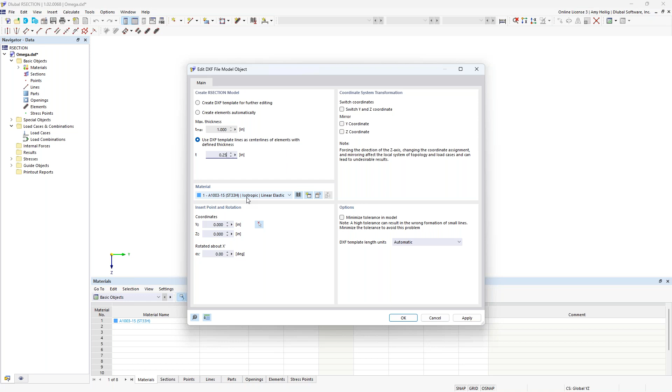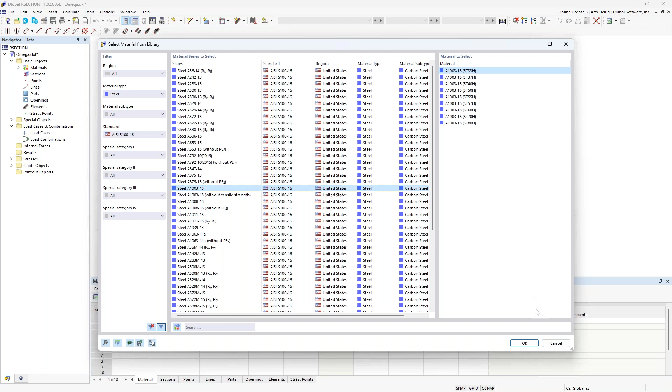We can visit our material library, and over on the left, we have the filters to utilize the steel dropdown and then the AISI S100. So here are all of the available materials for cold form steel. And notice that as we click through these different options, there are several subcategories as well. For this particular cross-section, we'll go ahead and utilize the A1003-15 and the subcategory here of ST33H. So that material will then be set within this dropdown, and we can go ahead and click OK.

So once the import is done, we actually see everything automatically generated for this custom cross-section. Now, I did want to point out that these are completely straight elements. We get a little bit better performance with the finite strip method with cold form steel sections when we just model directly these straight elements. It is possible to also model arcs at these corners where the elements join, but just know that the calculation time will be increased because of that. So ideally, it would be best to keep these as straight segments.

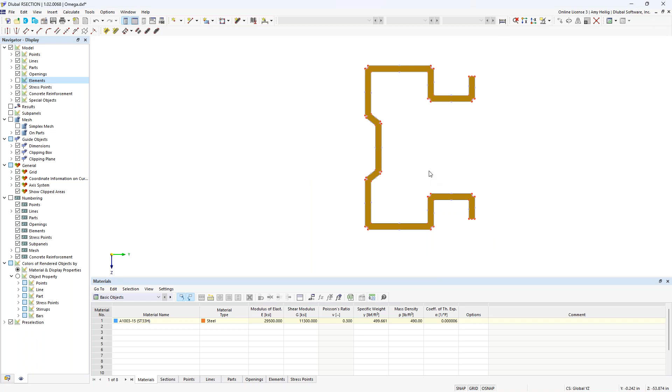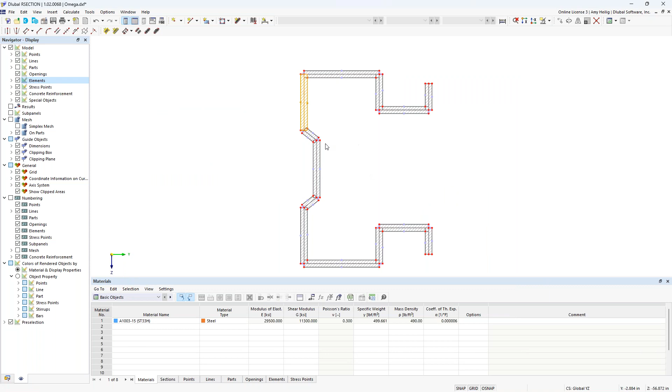Now, looking at the custom cross-section here, we have a couple of elements that, again, were automatically generated. We'll start off with what we call the part. And the part is automatically created between the exterior boundary lines here of the cross-section. Then on top of that, we have what we call the elements, and each one of these segments here is comprised of an element. We can right click to edit the element, and what you'll see here is that each of these has a particular thickness assigned to it as well as a length. And this information is important for the thin wall analysis and is required. So we would need both the parts and the elements.

So going back to the navigator here, I'm going to right click on the model name to access the base data. There are two analysis methods. The finite element analysis is set here by default, but this would be more so used for massive cross sections. Instead, we want to modify this to a thin-walled analysis.

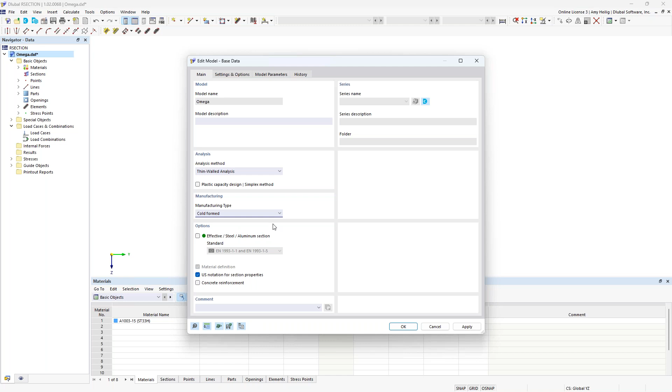Additionally, under the manufacturing type, we can set this to cold form. This will just be helpful once we bring this cross-section into RFEM that this data will already be set. When we click OK, we can simply go to calculate, calculate all, and immediately we'll see here that the cross-section properties are presented to us in table format.

So we have the area, for example, the moment of inertia, the section modulus, and this is the information that needs to be transferred to RFEM in order to understand the cross-section properties here of this section. Additionally, you'll notice the unit stresses are given here based on a 1 kip applied load, for example, for axial forces or maybe a bending moment. We can also view those stresses with the 1 kip per foot applied to this cross-section.

So once we have the cross-section properties, we do want to save this to our computer. In order to integrate in RFEM, we do have to have these saved cross-section properties from the calculation as well. And we will jump over to RFEM. So beginning our cold form steel structure today, when we create a new model, we would give it a model name. The type of model would be set to 3D.

And under this second tab, this is where we have our optional add-ons. So RFEM is the base program, and it's responsible for the modeling, the loading. We can integrate with BIM software, and it can run the full static analysis. So this means deformations, internal forces, support reactions. But if we want to take this a step further to actually carry out the design according to the AISI or the CSA S136, then we need to activate here the steel design add-on.

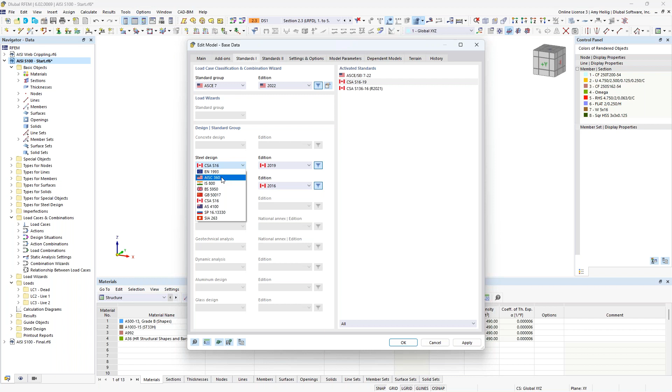So once this information is input, you can see here that for the sake of time, I have gone ahead and modeled our entire structure here. So this is some type of racking system maybe used for automatic storage and retrieval. Now we do have other webinars, tutorials that are dedicated to new users in the program where you can learn how to draw a beam, how to apply supports. So for the sake of time, again, we'll go ahead and just do a quick model review.

So over on the left in the navigator, we have here our various cross sections. So if I edit these cross sections so we can take a closer look, we'll see here the cold form steel sections applied to this particular model. So we have some channel sections, additional channel sections with stiffeners, and that custom cross section here was also brought in from RSECTION.

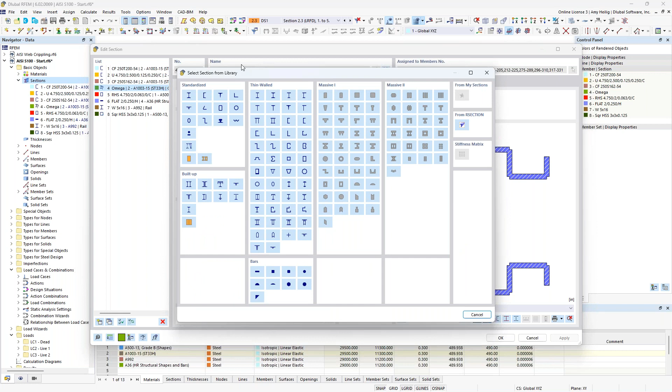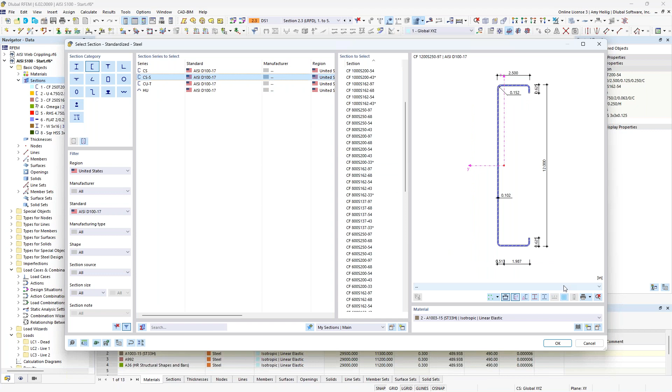When we look at our library database for our cross sections, if you want to choose a standardized section directly from the AISI, for example, if we take a look here at our channels, we'll utilize the filters once again on the left to filter to the United States, as well as the AISI D100-17, and we see the various channel cross sections, including hat cross sections, available to us here, again, directly from the AISI standard. Now, alternatively, if you have a parametric section that fits within the criteria listed here under thin-walled, you could simply input in the dimensions and the custom cross-section properties will be automatically calculated in RFEM directly.

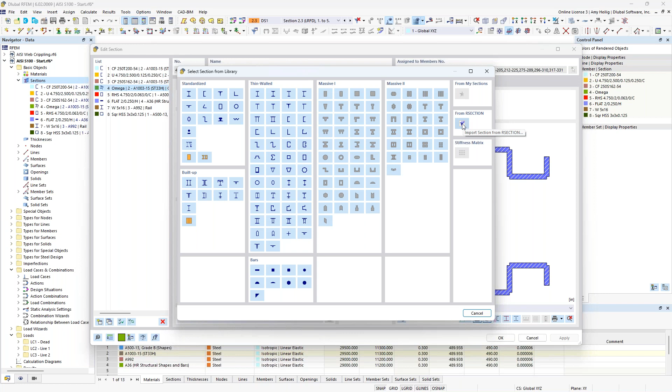And then alternatively, we have the import here from RSECTION, and that's what we utilized for the shape here in the background. I just navigated once I clicked this option to that saved file from RSECTION on my computer, and we can bring this in like we would any other member. So in addition to these cross sections, I have also assigned a material. So similar to our section, we can always visit the material database. Over on the left, we filter to steel, to the AISI, and once again, we have access to all of these various materials directly from the standard.

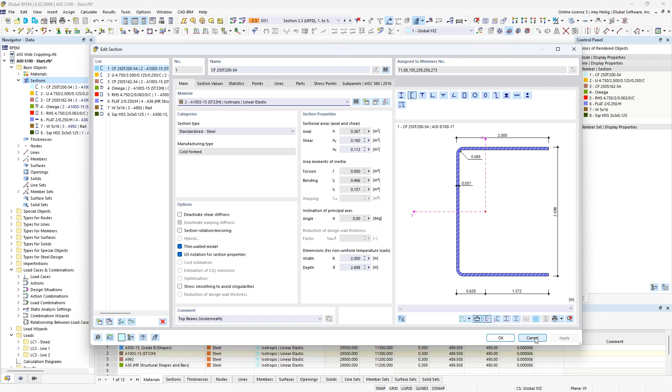So now that we have the cross sections and the materials covered here, we'll also see them within our navigator over on the left. When we take a look at that custom cross-section here for our column, and I'll zoom in, you'll notice that the program has actually rendered this true cross-section for me. And I'll go ahead and create a user-defined visibility here so we can see this in a bit more detail.

So you'll also notice that for these columns, utilizing the custom cross-section, they were actually modeled in segments here. So each one of these is a separate segment. Now, there is possibility in the program to model this as one continuous column and just to keep this as one member and applying intermediate nodes along the length. But alternatively, if we do model this in separate segments, it's entirely possible to create what we call a member set. So we do this by selecting multiple segments.

We can right click, and under the members option, we have here what's called create member set. So that's what you'll notice here over in my navigator, that the program has grouped together these columns. And this will come into play a little bit later on with topics like notional loads, but also the design. Again, wanting to design this as one continuous member rather than those multiple segments.

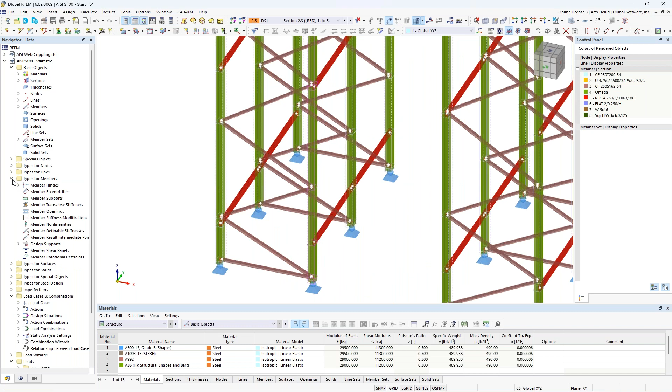You'll also see graphically the member hinges applied with the symbols shown at the member ends. So if we take a look at the types for members, we see here our various member hinges, and the member fixity all depends on how these cross sections or these members are connected to one another. So with cold form steel, it's quite typical to connect them with screws. And I have several different definitions here, just depending on what that connection is. So we have our 6 degrees of freedom. These are all based on the local axes of the member itself.

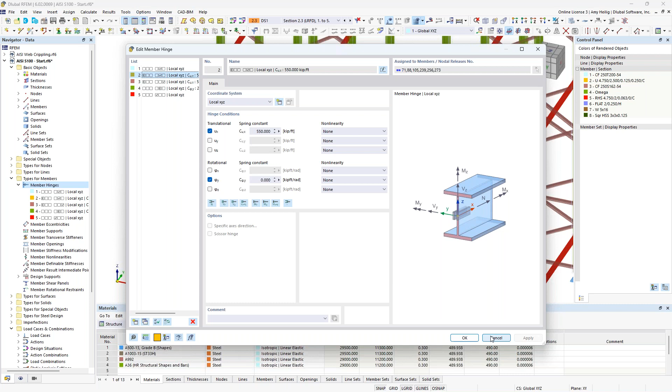You'll notice that for some of these, I've applied a spring constant. So something that's not fully fixed, not fully released, but somewhere in between. So within this model, we can take a look at the different hinges applied. They're probably a little difficult for you guys to see, but as I click through these, they are highlighted in the model depending on which member they are applied to.

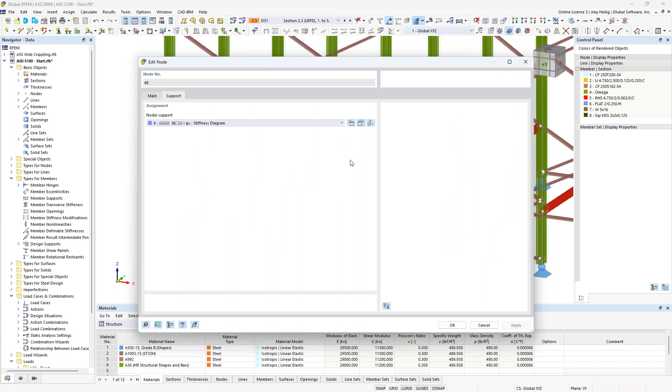And finally, we have our nodal supports down here at the bottom, which were applied just utilizing the tool up here in our toolbar. And these are also a bit special in the sense that initially they just look like standard pin connections, which you'll see under this definition type that we again have 6 degrees of freedom, but these are based on the global axes here, shown here in the background.

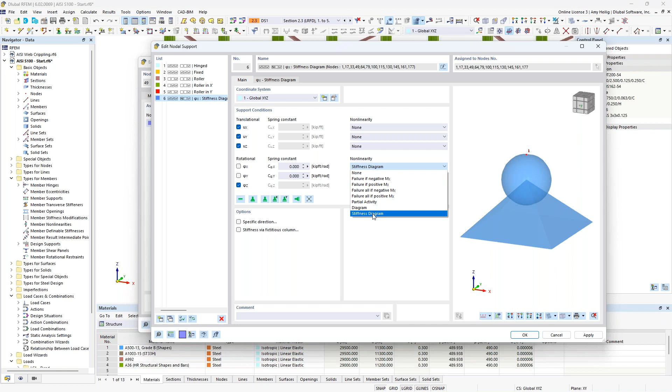So I've restrained the translation for this pin support, including the rotation about the global z-axis, but I've also applied a rotational nonlinearity. So this is within the rotation about the global x-axis, and under the nonlinearity options, I've applied a stiffness diagram. And we now get a new tab here where we can define this information. So you'll notice that I've set this so that the rotational stiffness is dependent on the contact pressure or the downward force for these nodal supports.

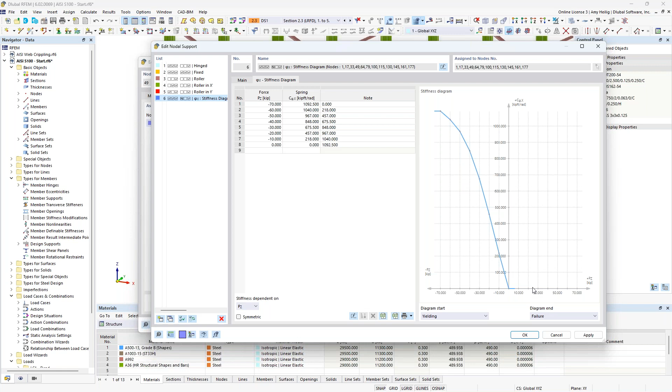So as the contact force increases here, we'll see a greater spring constant, and then in uplift, we'll see that support fully fail for rotation about the global x-axis. So entirely possible here to consider more complex scenarios for our nodal supports as well. So now that we have a basic understanding of the various members within the model as well as our supports, let us move on to loading.

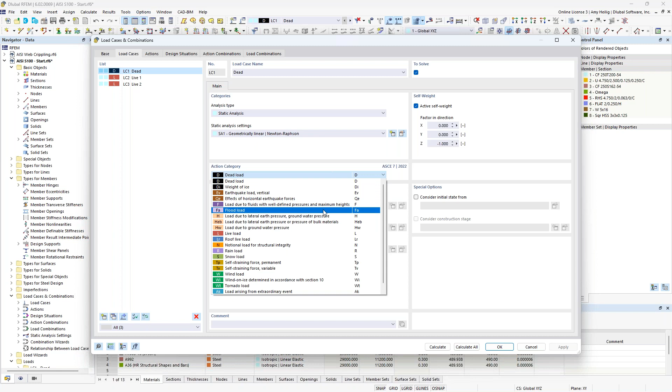So I have here 3 simple load cases that we can access in our load cases and combinations dialog box. So we have the first load case, which is dead load, and you'll notice that self-weight is active here, and the action category is also set, which is just dependent on the AISI S100, because remember back in the base data, this is the standard we're using to generate our load combinations. We can revisit that information here under our base tab, where we'll see the availability to change that standard if we'd like.

The second load case is a live load. So action category set to live, self-weight is turned off here. And finally, another simple load case, live load 2 with the action category set to live. So once these load cases are set up, we would need to actually apply the loads to the structure. So we'll begin here with the display of our dead load. So you'll see that I actually didn't apply any additional loads to this load case. We're only accounting for self-weight automatically under the hood for that particular load case.

Now looking at our live load 1, we see here, and I'll turn this into wireframe view, that we have the member load applied here at our beams, which are spanning between the columns. And a member load can be applied up here in the toolbar. But there is something a bit special about this particular member load. If I double click on it here, we'll see that it's just a standard downward uniform load of -0.5 kips per foot, but we have the ability to consider an eccentricity on the loading.

So when I turn this checkbox on, I get the additional tab up here at the top. Now the default behavior for a load is typically applied at the center of gravity or possibly the shear center. But alternatively, we can move that load application up here to the top center point so that perhaps we want to account for some additional torsion within the member for the design, or we can do so directly within the force eccentricity.

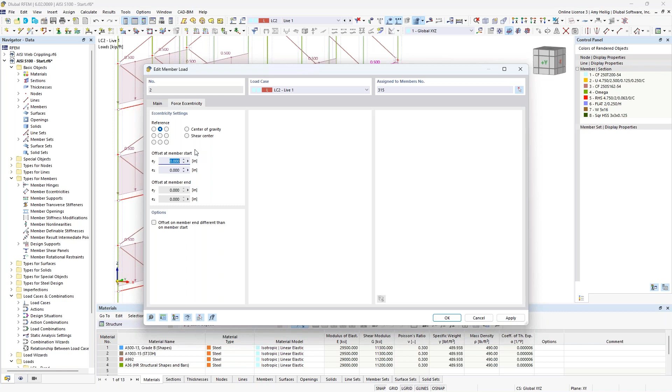So in addition to this first live load, we also have this second live load, and this is also a very simple application with a single nodal load applied up here to our center beam. So this load is just essentially introducing those horizontal forces to the entire racking structure. That nodal load can also be applied up here in our toolbar.

So going back to our load cases and combinations, now that we've generated those load cases, let's take a look at the design situations. So the program has automatically created 2 design situations for us, our LRFD design situation and ASD design situation. Again, these come directly from the AISI S100, and it's nothing more than just grouping together our factored load combinations for the first design situation and our unfactored load combinations for the second design situation.

We can always click on this little info button here, which will pull that information directly from the standard of what we're referencing. Design situations are absolutely needed when it comes to carrying out the design within the steel design add-on that we activated. So that's why you'll notice that these are by default checked on here for that particular add-on.

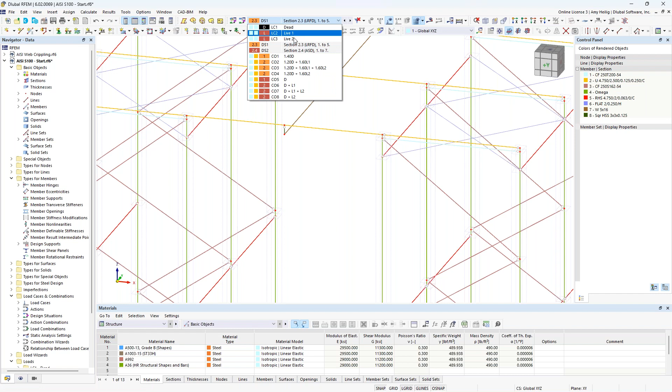So if we look back here at our model and keep in mind under this second live load, particular load case here, we have this horizontal load. So therefore the notional load to create the greatest destabilizing effect should likely be in this same direction. So those notional loads all just depend on the load magnitude and direction here for our load cases to consider that destabilizing consideration. So we want to begin by creating these notional loads with what we call imperfections.

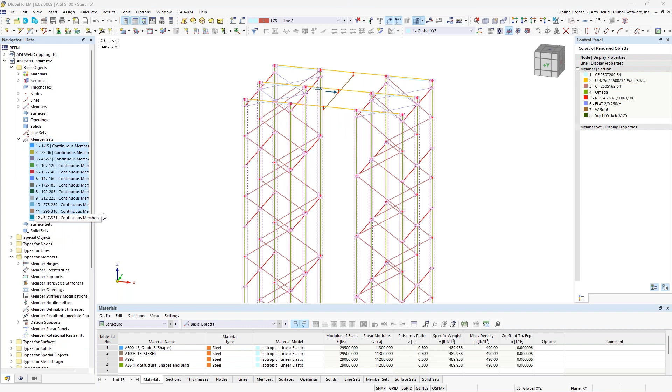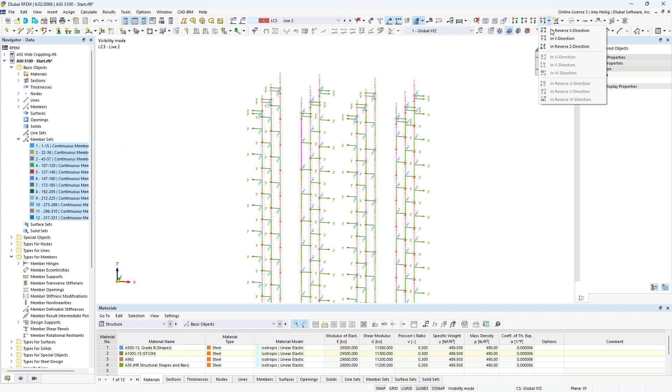So I'll begin by creating a user-defined view here for only my member sets. So we'll go up here to our toolbar and create that user-defined view. I'll go ahead and turn off the hidden objects in the background. Now, additionally, when we create our imperfections or our notional loads, these do depend on the local axis system. So if I right click, I can turn on the local axis system of all of these columns. So we'll take a look at the elevation view here.

Now, the imperfections are going to be available under our navigator here under the imperfections table. So we right click to create a new imperfection case. Now, again, the imperfection directions or the case all depends on which direction you want to apply them in your model.

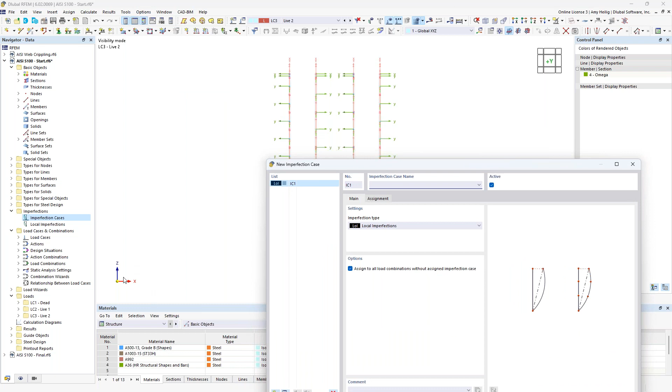For our case today, I'm going to create two simple imperfection cases, one in the global positive X direction and one in the global positive Y direction, or into the page here. Therefore, I need two imperfection cases. So we'll begin with imperfection in the X, and then I simply make a copy of this and I'll create my second case, imperfection in the Y.

Now, the imperfection type within this dropdown will be set to local imperfection. And under the assignment tab, there is the ability to assign specific imperfections or notional loads to specific load cases. Alternatively, though, we can just apply it to all of our load combinations, which is what we'll be doing today. So now that these imperfection cases are generated, we need to actually apply the notional loads to the structure. So now you'll see here under our imperfections folder these two imperfection cases.

Now we can apply according to each individual member, or we have the ability to apply to a member set. And because these columns are individual segments and I created member sets to group them together as one continuous member, then we will want to right click here to create a new member set imperfection. So within this dialog box, we use our drop down to directly select the AISI S100. And this is going to reference equation C1.112-1 directly from the code. So this should look familiar if we look that up within the code.

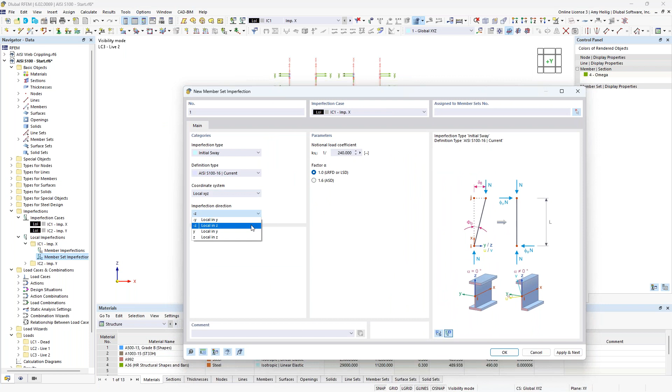So for our case today, this first imperfection in the X direction, we want to apply this based on the negative Z axis. And I'm going to select here my member sets in the first row and the third row. And we might be wondering, why are the local axes different here for the different member sets? And that's because in rows 1 and 3, I have the members rotated at 90 degrees. And then at rows 2 and 4, they're rotated at negative 90 degrees. So inevitably, this affects our local axes orientation, which is why we need to take a two-step approach here for the imperfection direction.

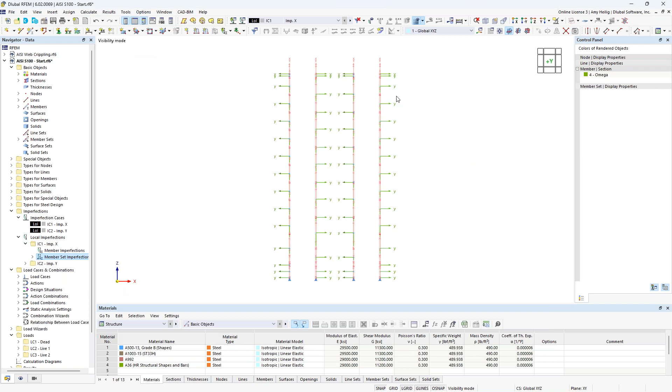So now that I've applied it to those particular member sets, I can click Apply and Next to remain within this dialog box and to simply modify my imperfection direction to the positive Y local axis. I'll go ahead and select these graphically as rows 2 and 4. I click OK, and I click OK once again. Now, if we display our notional loads here, or imperfections, we see that column out of plumbness applied, again, referencing the AISI, to our member sets or our columns directly.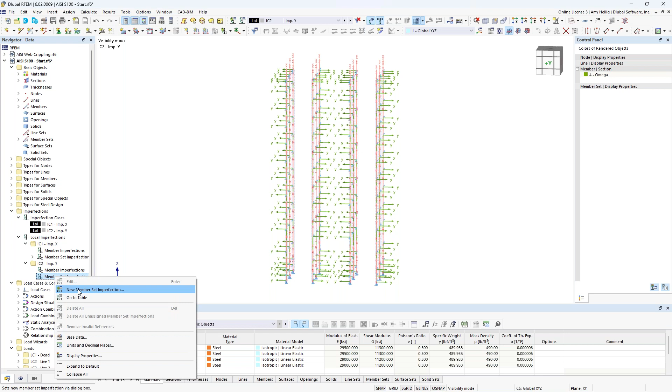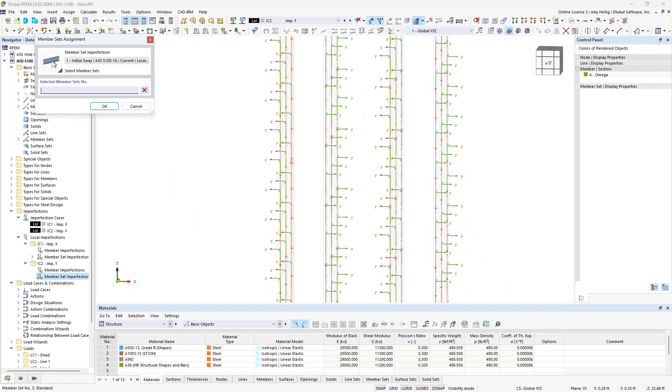We're going to do the exact same approach here for our members for imperfections in the Y direction. So we go back to our navigator to right click to create a new member set imperfection, this time under the imperfection Y case. We'll select the definition type directly as the AISI S100 once again. The imperfection direction this time is going to be in the negative Z axis, and I will go ahead and zoom in here to select the member sets in the first row and the third row. I click OK, apply and next, and then we just simply modify this to the positive local Z axis to select our member sets in rows 2 and 4.

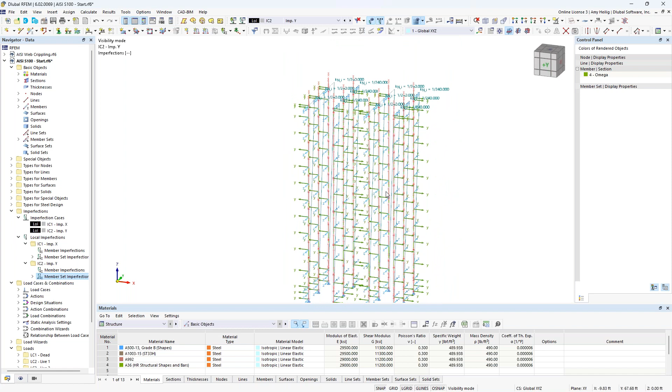I click OK through these dialog boxes, and now we should see this column out of plumbness, and I'll go ahead and right click here to turn off the local axis system, applied in the global Y direction. So this is how we can directly account for those imperfections based on the code requirements.

Now that we have applied the imperfections in these various cases, we need to combine them into the actual load combinations. So I'll drop down here to my dead load, and this will allow me to access the load cases and combinations dialog box. And under the design situation where we had previously set the second order analysis, we'll go back into this dialog box, and you'll notice here that we have a checkbox to consider the imperfection cases that is automatically turned on by default.

So therefore, for my factored load combinations, those imperfections will automatically be added in to the existing load cases as well. Now, the problem is that I want to carry out LRFD design today for my cold-formed steel structure, but I'm using my ASD design situation for maybe my serviceability or deflection checks.

Therefore, I don't want to consider my imperfections for this second design situation. Well, it's easy enough to create a copy of this existing definition type, and within this copy, I just simply turn off the imperfection cases.

So now going back into my main dialog box for my factored load combinations, we'll keep this as definition number 1. But for my unfactored load combinations, we're going to drop down and select the third option here where we turned off the imperfections.

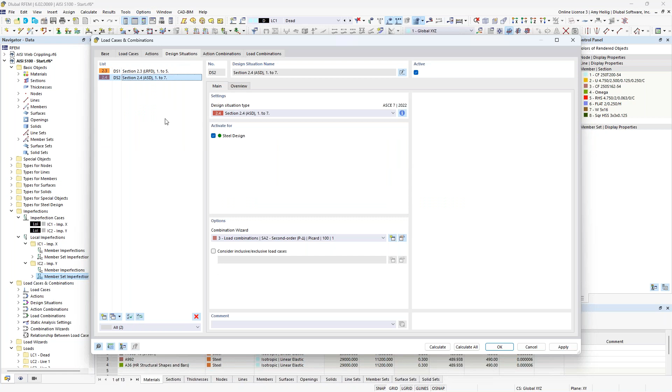The final topic, according to the direct analysis method, is stiffness reduction, and this is given in section C1.1.3. We reduce this stiffness to account for inelasticity effects as well as cross-section deformations. So in order to take into consideration the stiffness reduction, we are once again going to go in here to our combination wizard settings. And this option is actually controlled directly here with a new structure modification.

So we create a new definition type, and we're going to be applying this to our members. When we turn this on, we get an additional tab here, where under the member modification, we can use our dropdown to create a new member stiffness modification.

Now, very similar to what we saw with our imperfections or our notional loads, we also have the AISI S100 available in this dropdown. So this will reference the code directly and the particular equations given here to iteratively calculate this tau sub B factor that will be applied to the flexural stiffness for each member. And again, this is very similar to what we see within the AISC.

Now we also have an additional factor here of 0.9 that's applied to both the flexural and the axial stiffness. Now a difference here from the AISC is that within the AISI, this is 0.9, but within the hot rolled steel standard, this is 0.8. So that is one difference that you'll see here.

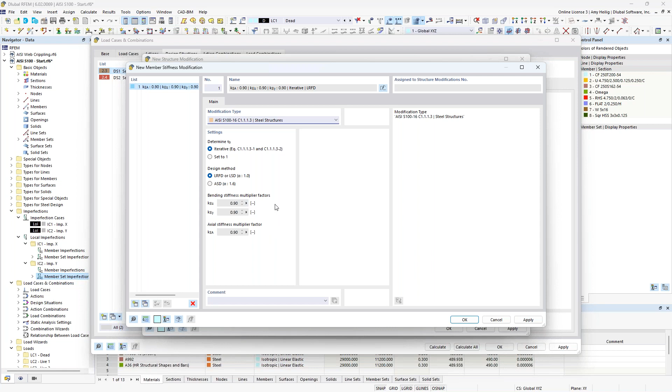Now, the code says to apply this stiffness reduction, once we have defined this, to all members that contribute to the lateral stability. So we certainly could use this option here to graphically select those members, or we could input the member numbers. Now, alternatively, we can just apply the stiffness reduction to all members. The code goes on to tell us that this is also possible.

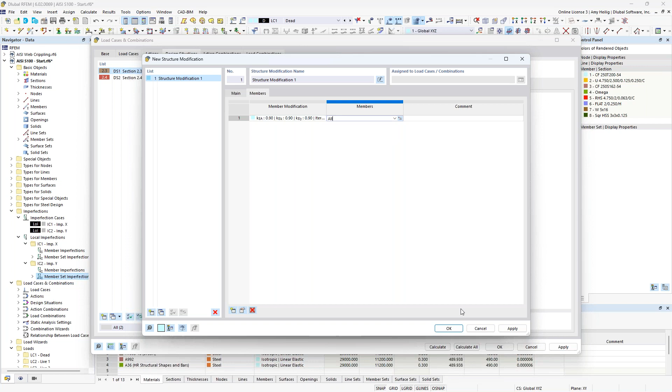So if we use our drop-down box for all, we'll now apply those stiffness reductions to all cold formed steel members within this model. But yet again, I only want to consider this for my strength design, which will be carried out with this LRFD design situation. For my unfactored load combinations, I do not want to reduce the stiffness, so I simply leave this unchecked here.

So once again, we'll go back to the load combinations to check this out in more detail. And sure enough, for each factored load combination, we see the additional setting here to reduce the stiffness. But if we jump down to our unfactored load combinations, this option is turned off.

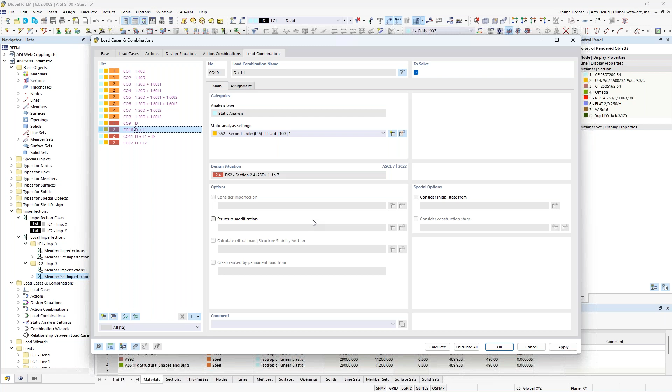Okay, so now that we have fulfilled the direct analysis method requirements, we're technically ready to run the full analysis. But the huge benefit of RFEM 6 is this better integration of these add-ons for the design within the main program. So we'll go ahead and continue on with some of the design input information specific to the AISI to carry out that workflow.

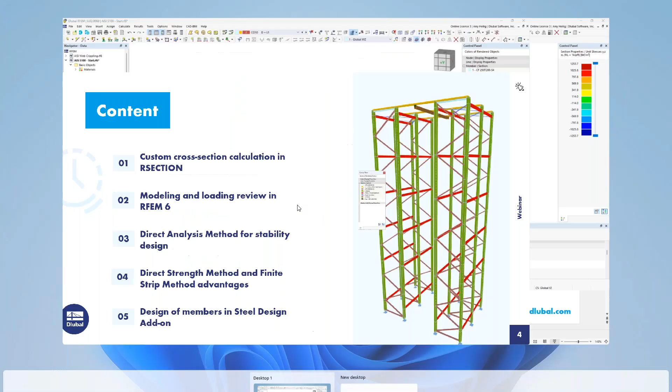For this, I'm going to go back to the PowerPoint here because I do want to talk in a bit more detail about the member buckling behavior. Very important topic when we're talking about these very thin-walled cross sections. So we know that there are failure buckling modes that are typically caused by compressive stresses on our members. And this is usually seen when we have a bending moment or an axial force.

Well, when we're talking about cold formed steel, there are 3 buckling modes that we typically consider. The first is going to be local buckling. So this is essentially where the elements bend with no translation at fold lines. And what I mean by elements, if you remember back to our custom cross section here, each one of these segments is a particular element.

Well, what we see also with this failure mode is that we have a short half wavelength. And what I mean by wavelength is this is the length at which the buckling shape repeats along the full member length.

Now, additionally, we also have global buckling to consider, and this is lateral bending of the entire member, and we typically think of this with flexural torsional, or lateral torsional buckling. Now for this, we'll see one long half wavelength, which is always dependent on the unbraced lengths for these particular buckling modes.

And finally, a bit more unique to cold-formed steel is distortional buckling. So this is more or less a combination of local and global failures, where we have some translation at the fold lines, but also the half wavelength is somewhere between what we see for local versus global. Now, there are 2 methods throughout the AISI to address buckling. The first is the effective width method, and the second is the direct strength method.

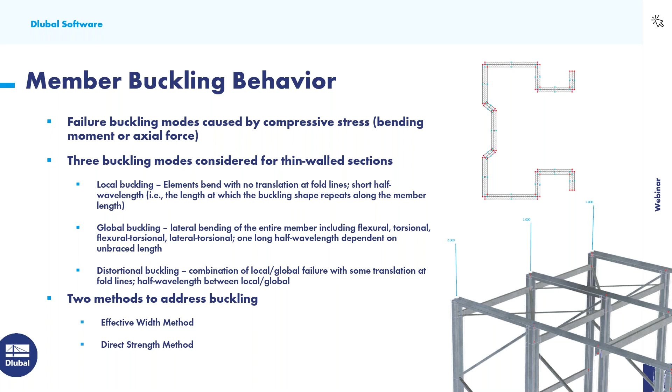So going to our next slide here, let us talk a little bit more about the effective width method versus the direct strength method, and maybe some advantages here that we have. So the effective width method essentially will consider each individual element here. So again, these elements are what comprises up our cross section. And an effective section calculation is required for each one of these elements. And we really don't have any interaction between these elements for the overall member or section behavior.

Now, alternatively, when we turn to the direct strength method, and this is going to be the method that RFEM is going to utilize, this has definitely some advantages in the fact that no effective width calculation is required for each one of these individual elements. There's no iterations required, but rather the gross cross-sectional properties are used for the entire section. We also have the interaction of all elements for all stability limit states because we're not considering, again, these individual elements, but rather the full cross-section itself.

We also have compatibility and equilibrium maintained at the element junctures. So where these elements connect is specific to the direct strength method, which, alternatively, in the effective width method, are more or less not accounted for. Direct strength method is also applicable to a broad range of sections. We might see more limitations when we talk about the effective width method and which cross sections it can be applied to. With the direct strength method, we really do have a lot more freedom here to apply this to pretty much any custom cross section as well.

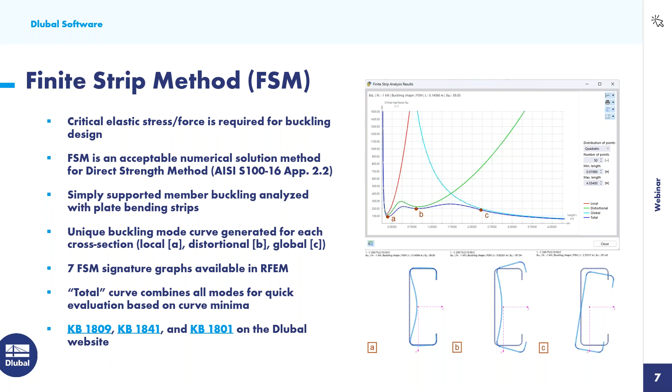Now, this is certainly a very interesting and complex topic, so I would refer you here to some knowledge-based articles that we have directly on our website that explain the finite strip method in more detail. It directly references the AISI. Those hyperlinks are included in the PowerPoint handout that you can access within the GoToWebinar to see those on our website in more detail.

Okay, so what we will do now is to go back to the RFEM model, and I'm going to revisit the cross sections here. So looking at the various cross sections, we'll immediately jump down to that custom cross section from RSECTION in particular. If we use our drop down over on the right, here are those 7 unique graphs that I just mentioned for the finite strip method. And these are all based on the applied unit load.

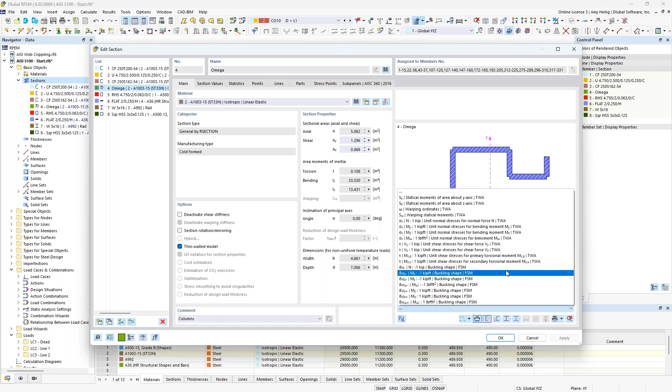So if we take a look at 1 kip axial force, what we will see is that finite strip method plot, again, referencing that PowerPoint. And this currently is showing the total curve. But additionally, what we can do here is to plot the local curve by selecting it within this dropdown. And we see that appear over here on the left-hand side with the red curve.

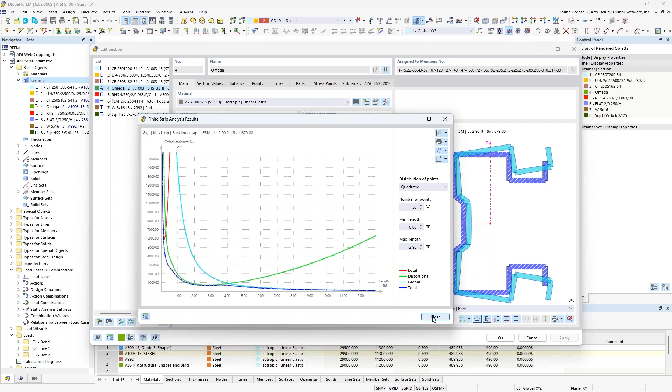We can also display the distortional curve. And finally, we can display the global curve. And ultimately, that total curve is going to consider all 3 of these, again, for just a quick evaluation here based on the curve minima along the length. So this is what's happening underneath the hood for every single cross section, again, even if it's a custom cross section.

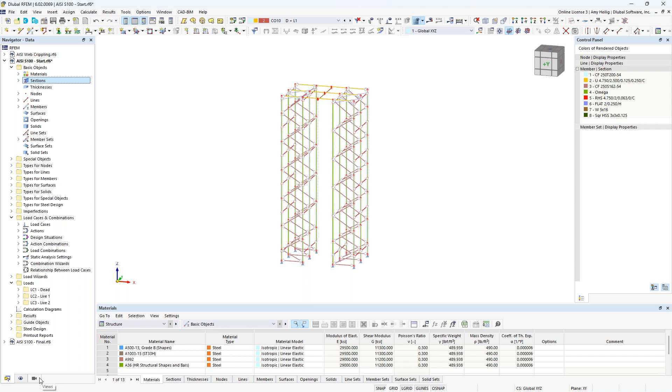So now that we have a better understanding of the direct strength method, finite strip method, we'll go ahead and take a look at global buckling now in a bit more detail with effective length definition. So when we design our members, we need to input information such as unbraced lengths. We'll begin here with activating only my rectangular HSS section. So let me go ahead and show the rendered view of this so you can understand exactly where these cross sections are. So these rectangular sections are spanning in between my columns. And we'll begin with the effective length definition for these particular members.

So we highlight them all, we double click, and what you'll notice is that the design properties here is turned off. This is telling the program that I'm not interested in carrying out the actual design according to AISI. Rather, I only want to carry out the analysis. When we turn on the design properties, this is going to reference the Steel Design add-on, and we get additional tabs here up at the top. So this is all information that is specific only for the design.

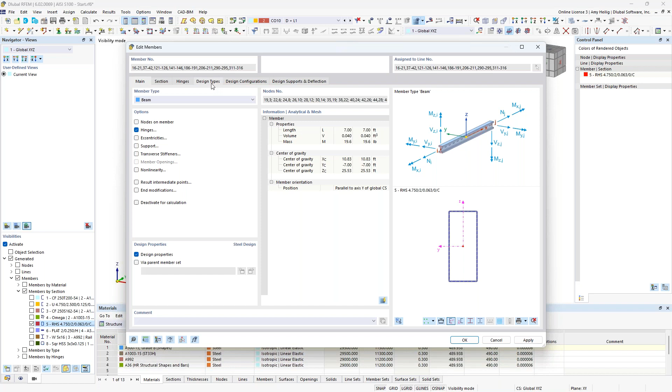Under the design types, we have here the effective length definition. So let us go ahead and access a new effective length definition. And you'll see here I can modify my view within this dialog box so we can see those HSS members spanning between the columns. We immediately want to change this to the effective length definition according to AISI S100 for these rectangular hollow sections.

Then you'll notice that for global buckling, we have here 4 considerations: flexural buckling, strong and weak axis, torsional buckling, lateral torsional buckling. We also have the ability here to determine the elastic critical stress according to the finite strip method or according to chapter E2 F2.1. So this is a really important topic. So I'm going to jump back again to the PowerPoint here to explain in a little bit more detail.

So you'll notice within this dialog box, as I just showed you, that we have 2 options here to determine the elastic critical stress. And the first option being the finite strip method or the numerical method. And this is going to be applied then for local, distortional, and global elastic buckling failures. But it should be known that if we do choose the finite strip method, that flexural and torsional stability failure modes are always grouped together for the global buckling. And this is regardless if we uncheck one of these options.

So if I am thinking, okay, my member is fully restrained against torsional buckling, but I'm still concerned with flexural buckling, so I fully uncheck this option, the program doesn't care. It still sees these grouped together because we're referencing the finite strip method graph. So this is purely a limitation of how these graphs are created, that flexural and torsional buckling are always grouped together.

Now, alternatively, if we leave these checked, but we have varying effective lengths or unbraced lengths for flexural versus torsional, again, because these are grouped together, we are always going to take the longest effective length. So if we would like to set a smaller length for torsional buckling versus flexural, again, the program just groups them together for those particular global stability checks and will reference the longest effective length. So just keep that in mind with the finite strip method, again, with the global buckling.

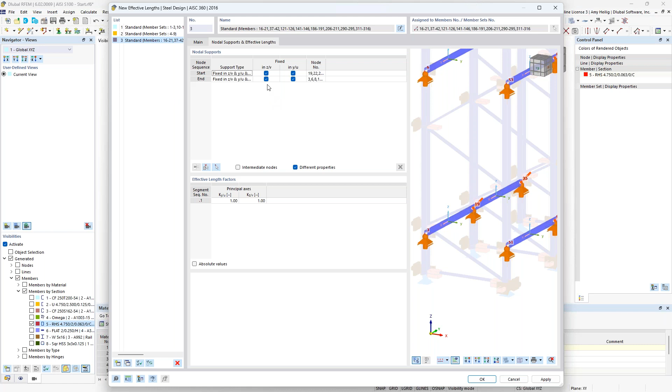Under this second tab, this is where we apply our intermediate supports, and you can see the program automatically will apply these at the member ends, and we will be fixed for flexural buckling in the strong axis as well as the weak axis. So that effective length, KL, will automatically be calculated for all of these members shown here.

So once we are done with the effective length input, we also have the ability to apply a local section reduction. Just keep this in mind that this is only for the tension design according to the AISI. We do not carry out any equations at this point in time for cold-formed steel considering holes. So everything is considered without holes.

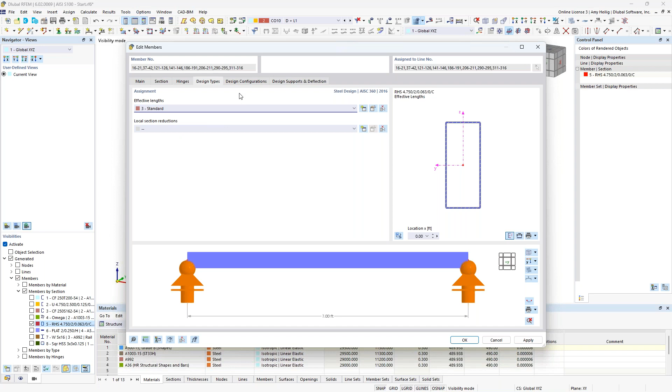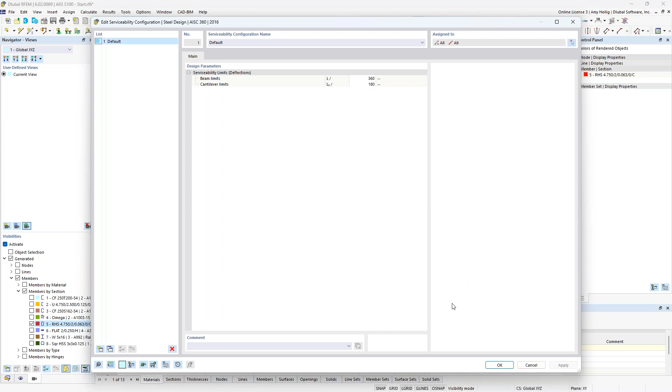Under the design configuration, we have here our strength configuration. So we take a look at the default settings here, just some various settings that we have put in the code references directly for alternative equations. So you could certainly take a look at here and make those modifications if you'd like. Under serviceability, this is just simply where we set our limiting deflection ratio for our deflection checks. So for simply supported members, we will reference this L/360, and for cantilevers, we'll reference L/180, but of course you can make modifications to this design ratio here.

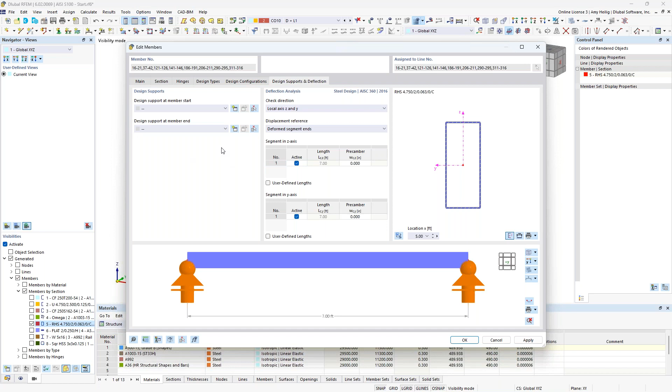And finally, we have the design supports and deflection. If I do absolutely nothing within this dialog box, the program automatically assumes that it's supported at either end. Therefore, we're going to reference the L/360 limiting deflection ratio. For our case today, we'll go ahead and leave this as default and not make any further modifications here. So now that this information is complete for these rectangular sections, I'll go ahead and cancel out my visibility here.

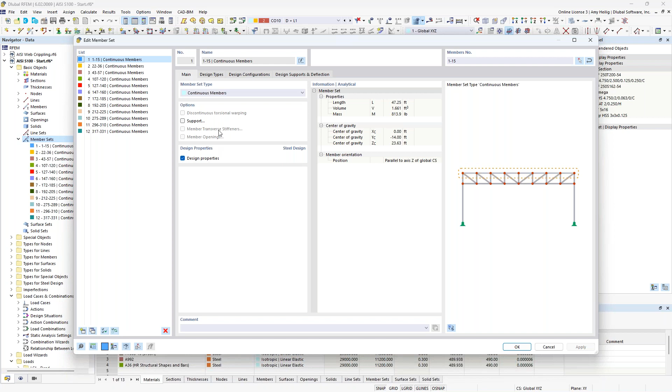I also have carried out the same workflow for my member sets. So remember, I want to design these columns as one continuous member. So rather than going into the individual member settings, we can come in here to our member sets. And what you'll notice within this dialog box is that this also has a design properties checkbox. So when this is turned on, we have some additional settings up here at the top within these tabs that look identical to what we just covered.

Now, because this column is certainly much more complex, I went ahead and defined the effective length already here. So you can see that I have flexural, torsional, lateral torsional buckling all considered. I'll go ahead and change around my view here so we can see exactly which members we are looking at. I am referencing the analytical method here because I have some different unbraced lengths for torsional buckling versus flexural buckling.

Now we have the ability to detect these intermediate nodes along the entire length, and notice that there are 4 degrees of freedom. This just all affects the effective length definition here for flexural buckling in the strong axis, flexural buckling in the weak axis, torsional buckling, and lateral torsional buckling. So depending on our particular connection and what members are framing in here, we can set these accordingly.

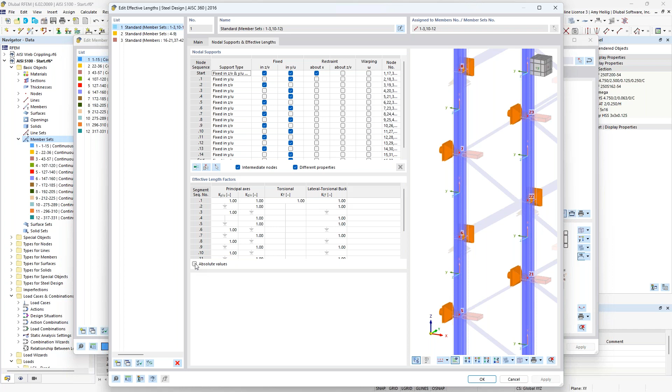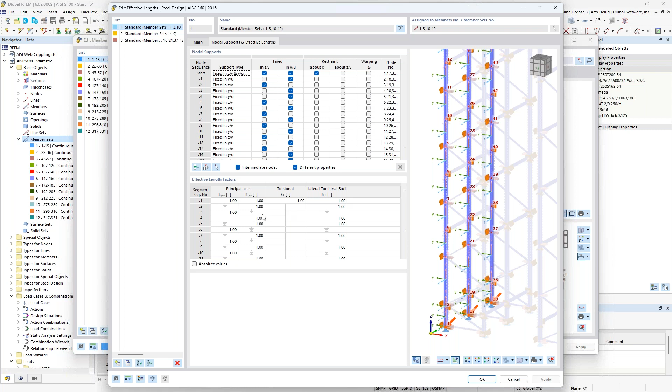And alternatively, if you have absolutely no interest in inserting in all of these intermediate supports, you can check on the absolute values here and directly input KL for each of these failure modes. And the downside to this is that if the model has any changes, maybe nodal location, we modify these slightly. If we use these options up at the top, everything will be automatically updated for our unbraced lengths. Alternatively, if we override these, we would need to come in and manually modify them, but that's certainly an option that you can take advantage of.

Also, under the design supports and deflection, you can see here that I have assigned specific design supports depending if the member is supported in the strong or weak axis direction. And these are applied all along the member length because I really don't want to reference the full column height for my limiting deflection ratio, but rather I want to reference the L, or the length, in between these intermediate supports. And we do so with the design supports. And notice that all of these intermediate nodes were directly detected within the program.

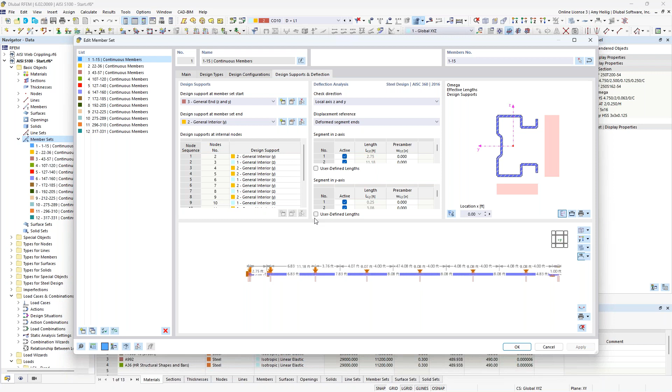Okay, so now that we have this information defined, such as unbraced lengths, we'll go ahead and exit out back to the program. And we want to jump down here to the steel design add-on. And you'll notice under this first tab, we have our design situation. So I had mentioned that if we carry out the design, we have to use these design situations. And the reason why is we see our first LRFD design situation that we are going to relate in the second drop down here to the strength limit state according to LRFD design. I'm using my second design situation, ASD, and I'm relating this to serviceability.

Now, alternatively, if we were carrying out ASD design, then maybe we would turn off altogether LRFD. We would set our strength limit state according to ASD for our ASD design situation. We can make an additional copy of this design situation for serviceability as well, or we could create our own custom design situation for serviceability. Again, for our example today, we'll go ahead and carry out LRFD design.

Under the second tab are the objects to design. Now you'll notice that defaults to designing all members and all member sets, but we have many members that are essentially given to us over here in this column in red, and that's because they don't have an effective length defined. So the program won't be able to design them, of course.

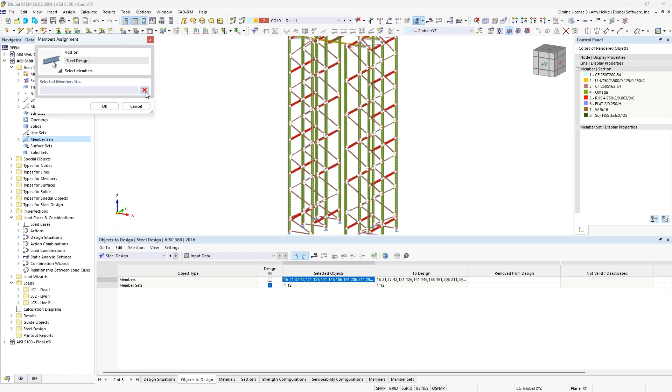So rather than designing all members, let us go ahead and graphically select here by clearing out this entry, and I'll turn on only my HSS sections so that I can graphically select these. The member numbers are automatically input here. And now we're ready to carry out the design for this simple example only for my rectangular sections, but also for all of those member sets or each of those columns. So we go to calculate all.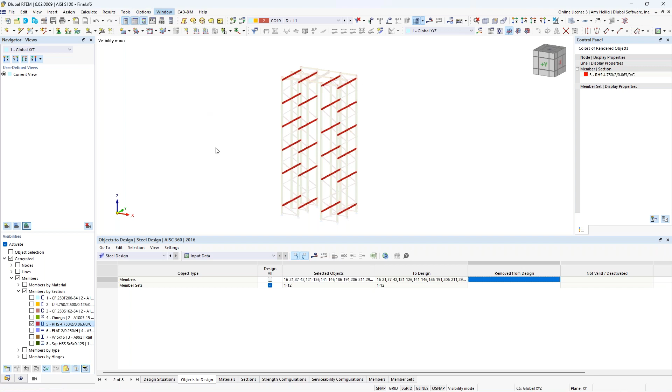Now, because of the finite strip method, remember for all of these individual cross sections, the calculation time does take a few minutes. So rather than waiting for that, we will jump to an already saved model here with our results. So once the calculation is done, we are currently looking at the steel design add-on, but we now have available to us the design ratios on the members. And we could view these design ratios in the table format here for each individual member. And you'll notice that as I click within this table, the program will automatically sync here in the graphical view to show me exactly which particular member I'm looking at. That red arrow is showing me for that particular check exactly what's controlling.

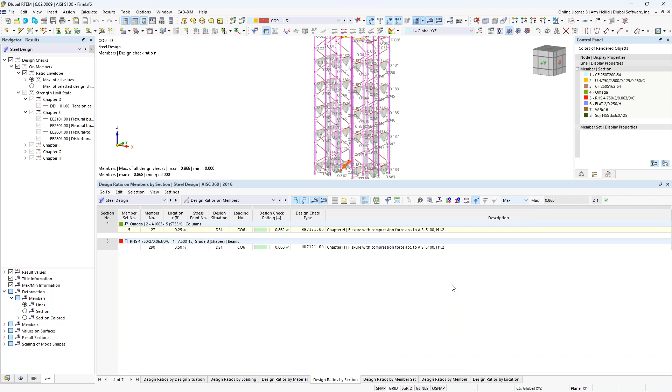But maybe we look at the design ratios by the cross section because I've only designed 2 cross sections for today. We have here our custom cross section from RSECTION that we brought into the program, as well as our rectangular hollow section here. And you'll notice that we are checking every single chapter here for our strength design as well as serviceability, referencing each chapter. Now, if you're only interested in the max design ratio, we could always use our filter here to select the max. And now we see just the controlling design ratio for this particular cross section.

And for these individual checks for each chapter, we can access what we call the design check details. So this is new within RFEM 6, that for all of these code calculations, you'll notice here that we list the formulas line by line. We have all references to the AISI standard, and we have all the variables also listed out here, and ultimately how we are calculating this design ratio. So trying to be as transparent with this information as possible so that you can follow along with your own hand calculations to ensure that you agree with the program's output.

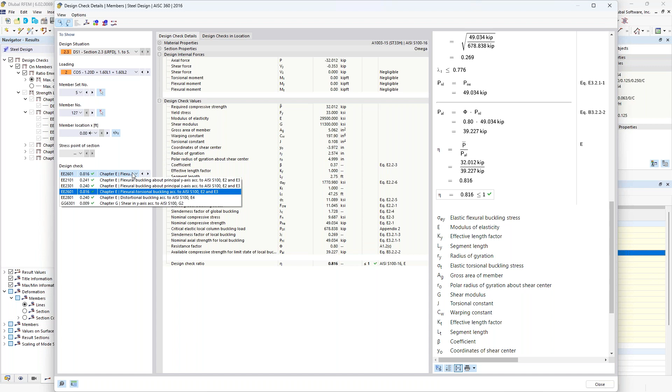We can print this to our printout report. What's nice is that if we do this and we make any model changes, we rerun the design, the picture of these calculations will automatically update as well. We can jump down to any different particular check here to view the various formulas for chapter E, for example. Also within this dialog box, we can access what's called the diagram in section.

So under my drop-down box, we see our custom cross-section here where we can view the stresses. And within this additional drop-down box, we can view the total normal stresses, or we can view the total shear stresses, or perhaps we're interested in the von Mises stresses. And this is all for load combination number 5 at the X location of 0. So just trying to give you a little bit more information here in terms of the stress output for these cross sections.

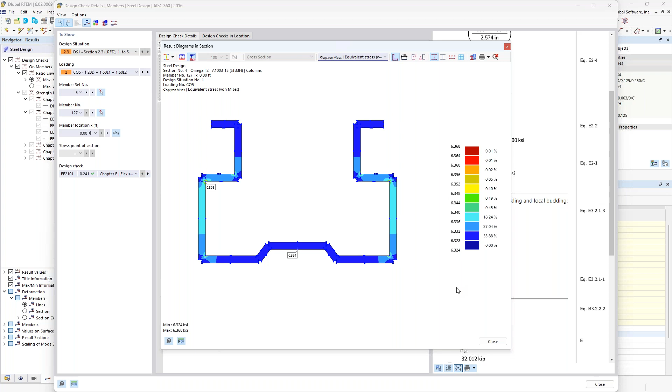So now that we have viewed this information in table format, notice that over on the left under the steel design, we can turn on and off the various design ratios shown graphically here. Currently, we're viewing just the overall max ratio envelope, but you'll notice under these options, we can individually select the different checks.

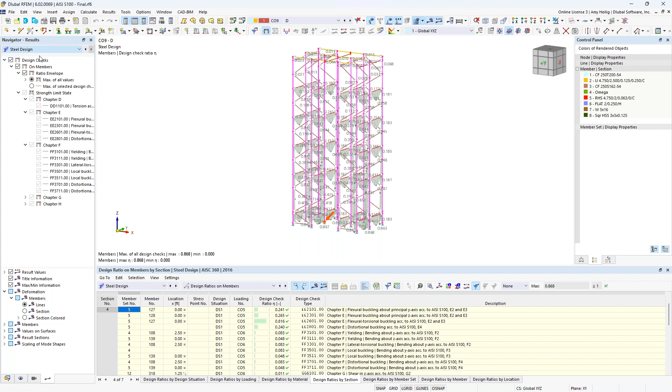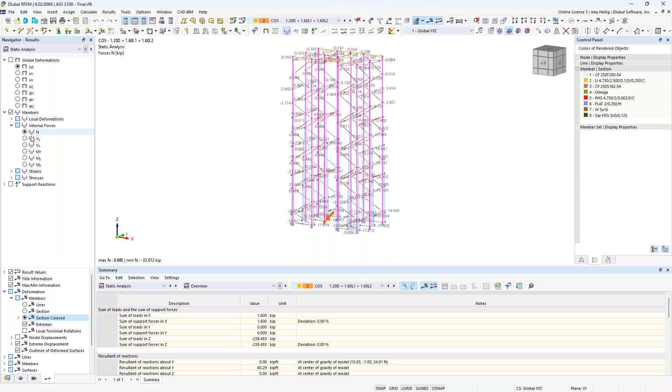So backing up a step, if we also use our drop down here to take a look at the static analysis. So we're currently viewing any one of these load combinations, and this was the static analysis carried out directly within RFEM. So we can view the global deformations, for example, and perhaps I change my deformation display to colored cross sections. We can also view the member internal forces. So we can view the axial forces or the shear forces, bending moments.

If we zoom in here, we can right click on one of these members and access what we call the results diagram. And you can do so with individual members or groups of members. This will allow you to turn on these internal forces or deflections and view in a bit more detail what's going on along the member length.

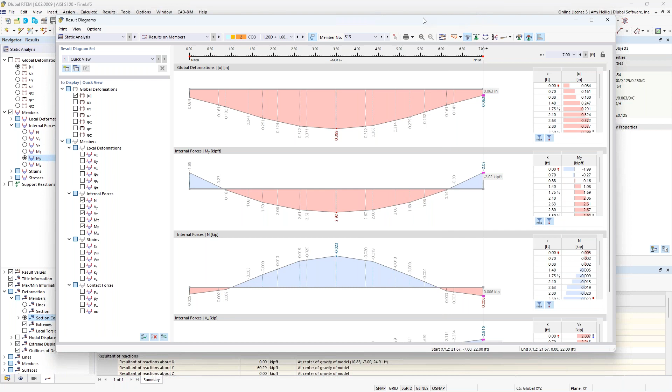We can switch to a different load combination here. We can add this information to the printout report. We can smooth, we can average out these forces. So quite a bit of information here that we otherwise wouldn't be able to do graphically. And you can slide this over to your second monitor and work concurrently in the program.

So in addition to the graphical output, we also have our table output for the static analysis, where we can view the results by members, such as the internal forces. We can export this information to Microsoft Excel with the click of a button up here for further sorting capabilities.

So hopefully this just gives us a nice overview then of the full analysis and design workflow for these cold-formed steel sections according to the AISI. As we know, identical workflow for the CSA S136.

So in the final few minutes here, I do want to turn to a topic that is maybe a little bit more unique for an FEA program. And this is web crippling design. So typically in a lot of FEA programs, we just simply can't account for these additional checks. But within RFEM, we actually have integrated these. So we can carry out the design of web crippling according to section G5, and this is web crippling without holes, as well as section H3, which is combined bending and web crippling.

Now, this is only applicable for sections that are referenced directly within the standard, in particular table G5-1 through 4. And those sections are listed here. So any other cross-section outside of this list, we won't be able to check web crippling, so you would need to manually take that into consideration. Another requirement is that the member must have 0 rotation set. So we can't rotate this member 90 degrees or 180 degrees. We need to leave it at 0 if we do want to carry out these additional checks.

So what we'll do is to go back to the RFEM model in the last couple minutes, and I'll pull open this simple single beam element here. And this cold-formed steel section, if we zoom in here, is just a typical channel section with some stiffeners added at the end. And this was from the AISI database within RFEM. And we have a uniform load here at 0.22 kips per foot along the full member length.

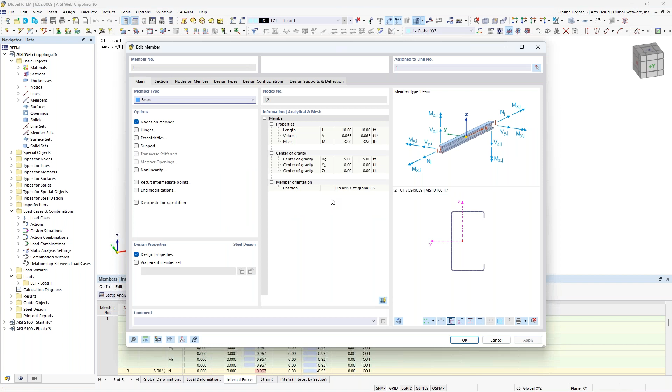Well, if I double click on this section, everything is as we've already learned from our previous example, except for let's take a look at the design supports. So you'll see here that I have already defined supports at the 2 ends as well as the interior with that automatically detected node, but we do need to create the design support definitions. So you can see the first one, I have labeled this as the end support, and the type in this dropdown is set to steel.

If we have this set to general, we'll only consider these design supports for deflection. But when we have it set to steel, this will allow us to further carry out not only the deflection checks, but also the web crippling. So you'll see that I do need to give it a support width. So we enter in the support width. For my end support, I set this at 3 inches.

We need to tell the program if it's an end support, if it has an overhang length, and also is that support fastened to the member. And this information is all important to reference to chapter G5 from the AISI. Without it, we wouldn't know what variables such as safety factors, resistance factors, coefficients to reference without directly inputting it in here. Now I also have a second definition for my interior support.

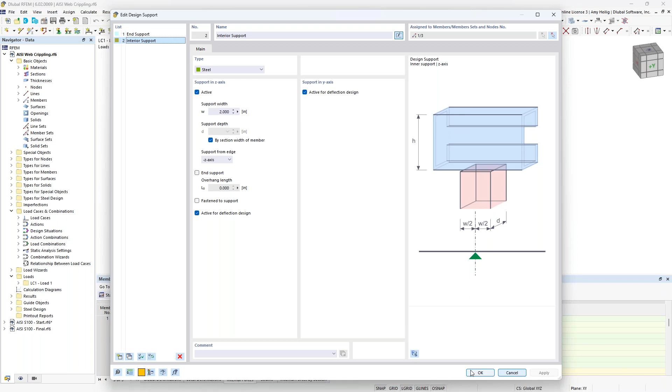So if these supports vary, that's no problem. We just create a second definition type here. The type is set to steel. My support width was decreased to 2 inches. It's not an end support, and maybe it's not fastened to the member. So once we have the definition set, then we just simply use our drop-down box to assign them to the nodes along the length of the member.

So once this is input, we can take a look here at our steel design results. And you can see that my design ratios here, except for these ones shown in red, are very low. We have 0.304 or lower for this particular cross-section design according to the AISI. These two checks that are over the 1.0 ratio are specific to web crippling.

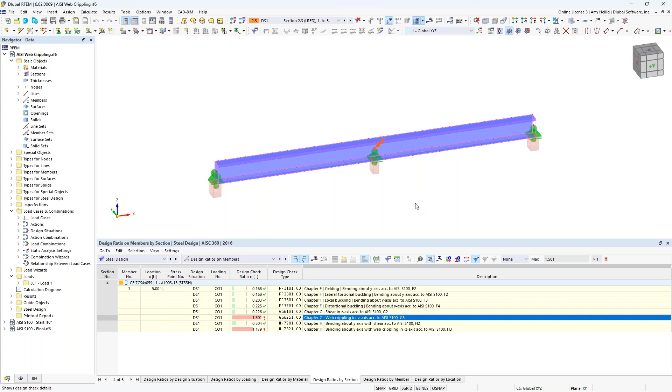So you can see how perhaps if we forgot to carry this out, the member looks like it's passing quite well. But when we add in these additional web crippling checks, we see that actually the member is not adequate. Again, web crippling according to G5, as well as combined bending and web crippling according to H3. We can pull open the design check details here, and we can see all of the information where we will reference those tables in G5.

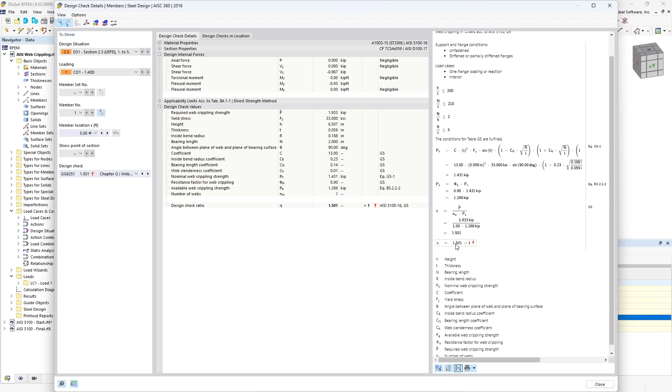We list them out here in table format as well, and ultimately how we're calculating that design ratio for web crippling. So just an added benefit here of RFEM, again, that many FEA programs can't consider, but because we have those specific steel design supports, we can carry out this additional check.